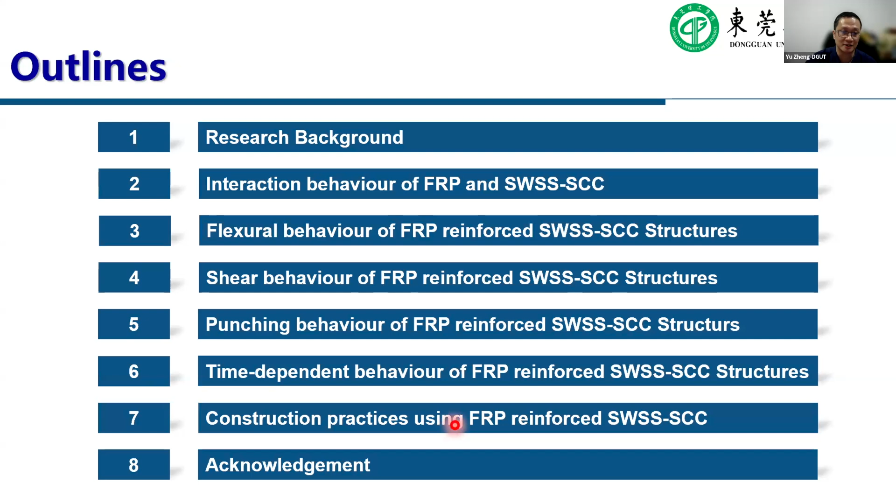First, we want to introduce the research background, since most colleagues in this webinar research composite materials. It has been well reported that the sustainability of infrastructures around the world is threatened due to steel corrosion and high carbon dioxide emissions in the production of cements or concrete materials.

Furthermore, currently in large construction projects in China, river sand is not allowed to be used due to environmental protection factors. Therefore, engineers and academics are seeking solutions to avoid these problems. Therefore, we try to use FRP reinforced self-compacting concrete using seawater and sea sand.

It's also evident that corrosion of steel reinforcement inside concrete has caused serious safety, social, and economic problems. In China, we can find a 2.8 trillion RMB economic loss caused by steel corrosion, around 3.3% of GDP in 2018.

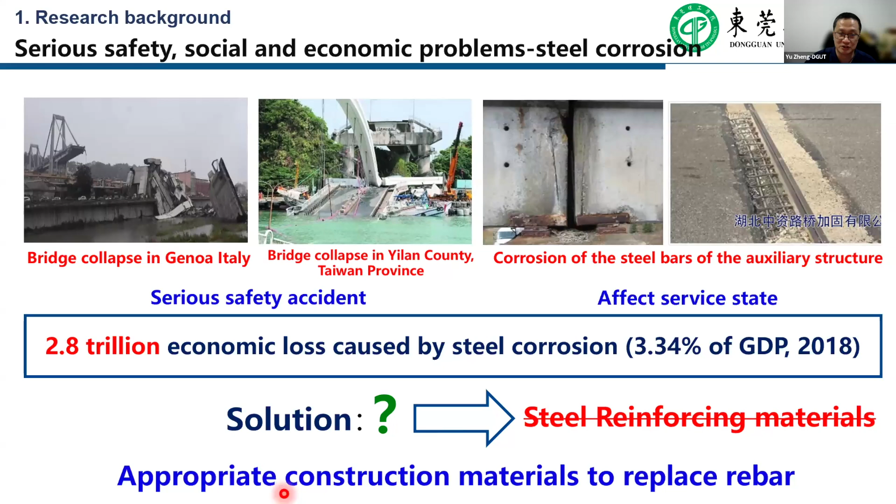Therefore, how to solve that? Maybe we can use some new construction materials to replace the steel rebar. We find that if we use fiber reinforced polymer reinforcing materials, that could be an effective way to solve the problems of short service life, low safety and reliability, and weak disaster prevention or mitigation ability, while meeting high safety and durability requirements.

Furthermore, these materials have lightweight, high strength, corrosion resistance, and convenience for construction, effectively improving structural performance. This reinforcing material can be widely used in marine engineering, bridge engineering, or underground engineering. Furthermore, why do we want to provide research related to self-compacting concrete? Because this is a collaboration between my research group and Susan Taylor's research group at Queen's University.

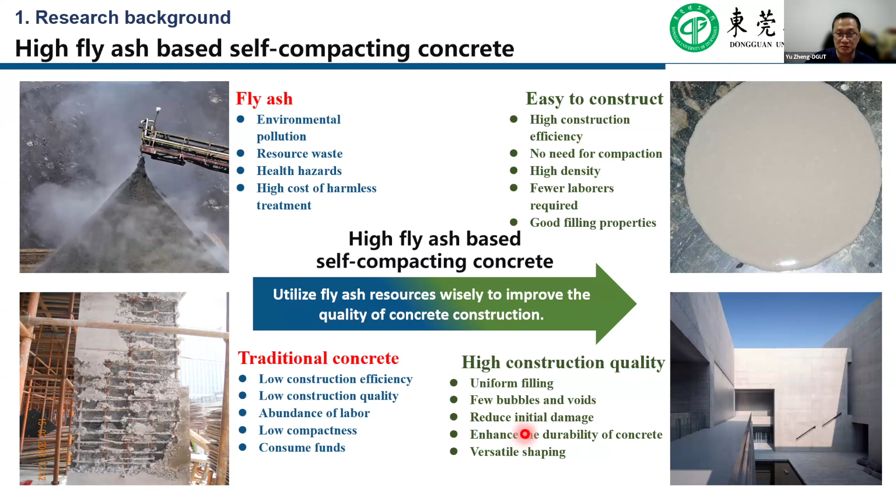We can find that if we use fly ash to replace cement, to produce high volume fly ash self-compacting concrete, compared to traditional concrete it provides uniform filling, few bubbles and voids, reduces initial damage, and enhances the durability of the concrete.

Therefore, when we extend this research to combine seawater and sea sand with high volume fly ash or high volume industry byproduct self-compacting concrete, we find that concrete made with seawater and sea sand develops early strength faster than ordinary concrete, with long-term strength comparable to ordinary concrete.

Furthermore, durability issues can be effectively addressed through FRP reinforcement. Using seawater and sea sand also helps reduce demand for fly ash resources and river sand, and reduces transportation costs. Finally, the behavior of seawater and sea sand self-compacting concrete compared to traditional self-compacting concrete is better. Therefore, we try to combine these materials together to produce it.

Therefore, it has been evident that using FRP as a replacement of steel reinforcement is an effective way to solve steel reinforcement corrosion. And therefore, based on FRP material properties, seawater and sea sand can be used in concrete production.

On the other hand, some environmentally friendly concrete can be adopted by using high volume industrial byproducts such as fly ash as a replacement of cement, to produce self-compacting concrete. Additionally, our research combines those materials together. We try to use FRP as a reinforcing material and use seawater and sea sand self-compacting concrete for construction.

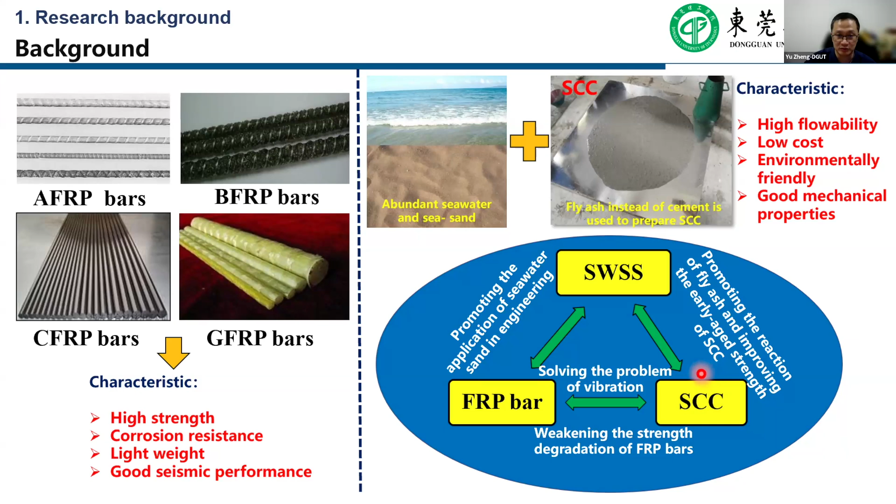Therefore, we can find that it can reduce three problems, including the steel reinforcement, the carbon dioxide emission, and reduce the use of river sand and fresh water. Those problems can be solved together. Therefore, in this research we develop a comprehensive study, including material research, mechanical properties, and component development and construction practice.

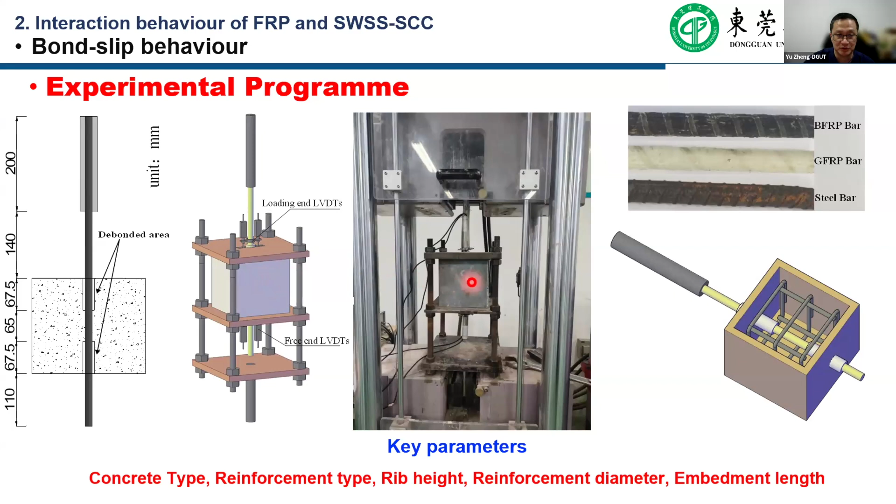The second part of this presentation is where we try to introduce the study of the bond behavior, the tension stiffening behavior of the FRP reinforced SWSS-SCC. In the first stage of the study, we used the pull-out test to study the bond behavior between the reinforcing material and the concrete.

Additionally, we also used the AE method, the acoustic emission method, and piezoceramic transducers to identify the damage process of the bond test. It can be seen in those figures compared to steel reinforcement, the bond strength will be lower due to the lower elastic modulus, and the bond stiffness can also be reduced due to using FRP reinforcement, and some damage can be found after we remove the concrete.

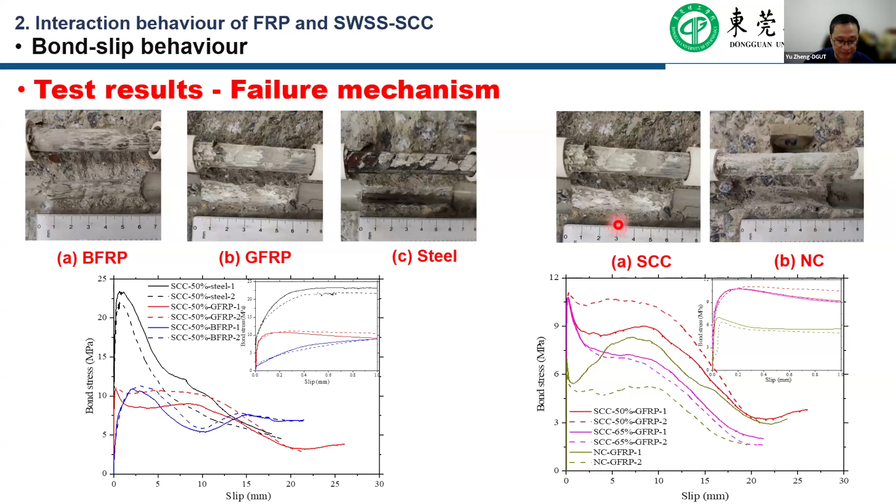Compared with two concretes, self-compacting concrete and normal concrete, due to the better compactness of the self-compacting concrete, we find higher bond strength in the FRP reinforced seawater and sea sand self-compacting concrete. These results can be expected. This is the comparison of the influence of the reinforcing material, including steel and FRP.

Furthermore, we also use some PP fiber inside the concrete. We find that by increasing PP fiber inside the concrete, the bond behavior can be improved. And furthermore, with increasing development length, the bond strength also can be increased at the same time.

And furthermore, we can find that when we use different models, the seawater and sea sand self-compacting model, we can obtain higher bond strength due to the better compactness between the concrete and the FRP reinforcement. And finally, we get some results.

The type of concrete has little effect on the bond strength between FRP and concrete, but using self-compacting concrete can improve the bond strength a bit. And the bond strength decreased with increasing reinforcement diameter. That has been reported widely.

And the bond strength of FRP reinforced seawater and sea sand self-compacting specimens is comparable to steel reinforced seawater and sea sand self-compacting specimens. And the increase of the rib height in the reinforcement has resulted in a significant improvement of the bond strength.

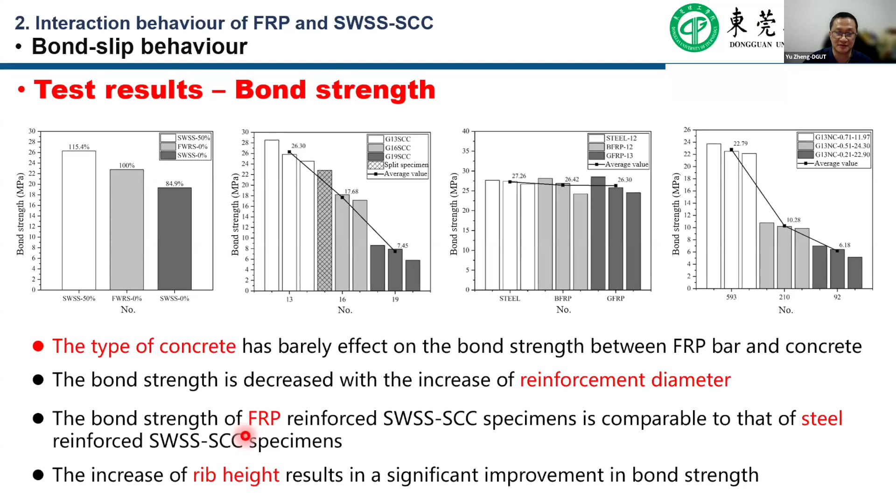In the second part of this stage, we use piezoceramic sensors to try to identify the failure modes of these bond slips, and try to quantify the damage level of the bond failure. This can be found at the beginning of the bond test, and this is with the pull-out test. The signal that can be found will change significantly.

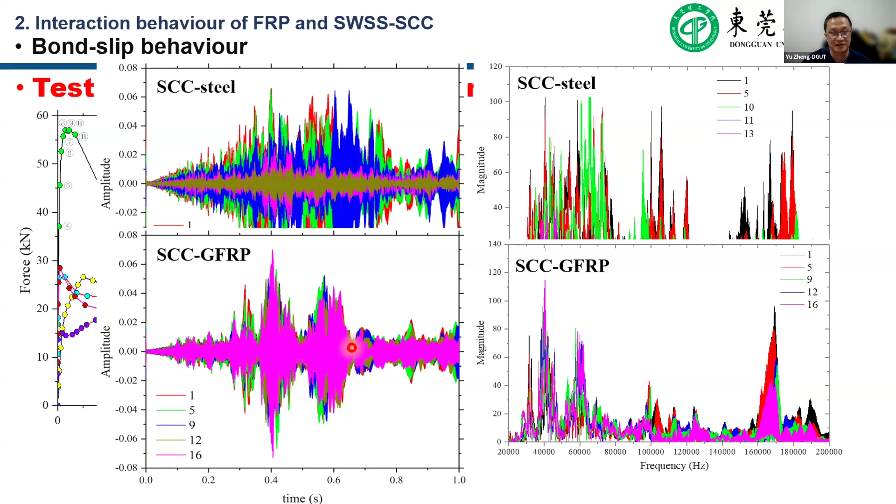And after that, we use the wavelet energy ratio to establish an index to quantify the damage in the bond failure, and we find that it shows a good correlation with the test result. Therefore, we can use that to quantify the damage level of the bond behavior of the FRP and self-compacting concrete.

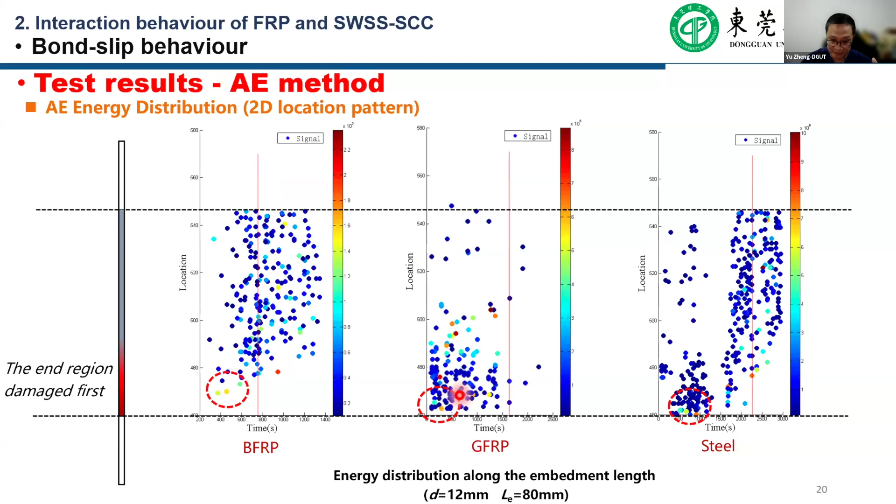And the third part of this study, we try to use the AE method, the acoustic emission method, to try to identify the initial damage location in the bond test. We find that this can identify the initial damage accurately, and it's in the part close to where the load is applied.

And furthermore, we also can use the method to identify the failure modes. We find that for the FRP reinforced specimen, the failure mode is determined by friction, which is dominant. But for the steel one, it is friction combined with mechanical interlock, based on the signals from the AE methods.

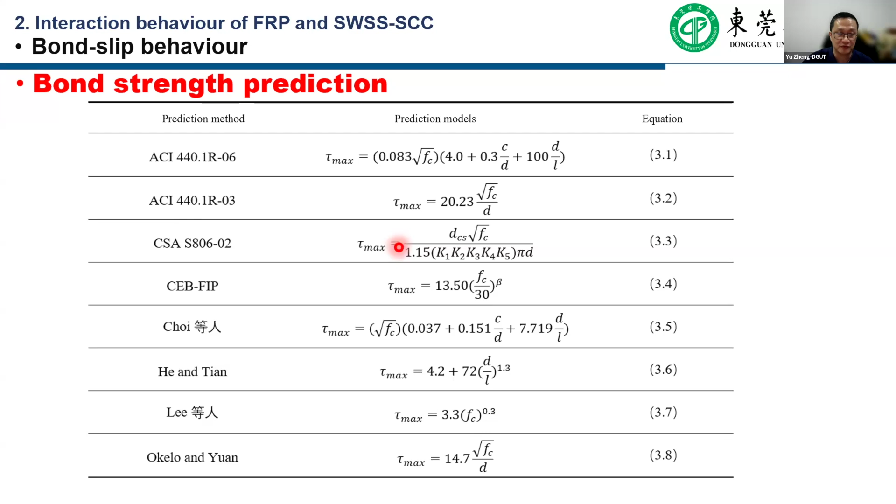And the third part of the bond behavior study, we try to use a current prediction method to try to predict the bond strength and the embedment length for the FRP reinforced seawater and sea sand self-compacting concrete.

In this comparison, we can find that the effect of the reinforcement diameter is overestimated, but the effect of the concrete interface compactness has not been considered. Therefore, we try to consider the small aggregate inside the self-compacting concrete, and try to establish an accurate prediction for the FRP reinforced seawater and sea-sand self-compacting concrete by developing a method for bond strength prediction.

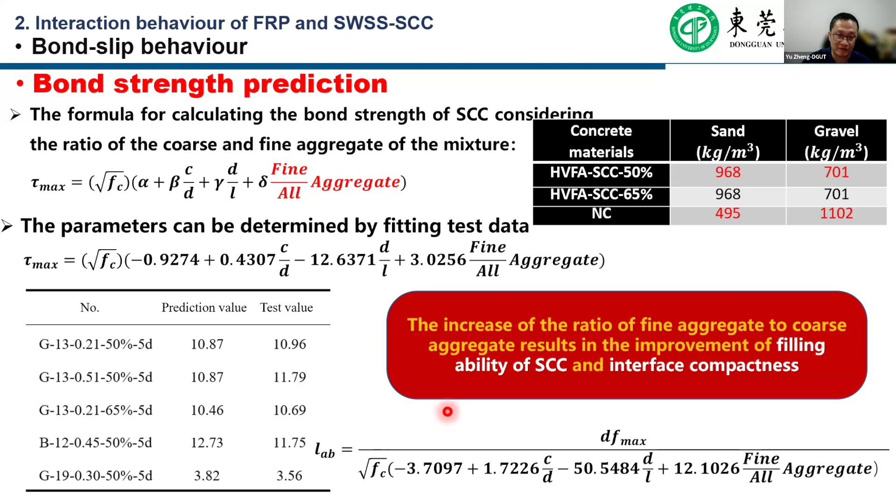Furthermore, we can use that to predict the development length for using FRP and self-compacting concrete in the future. We use the current prediction method for the bond-slip curves, and we find that a modified BPE model shows accurate results to predict the bond-slip behavior for self-compacting concrete and FRP reinforced structures.

Therefore, we try to extend further research using artificial neural network methods to predict bond strength with the following input factors: the bar diameter, the tensile strength of the bar, the elastic modulus of the bar, the concrete compression strength, the thickness of the concrete cover, and the embedment length. A total of 560 experimental data points were collected to establish the database.

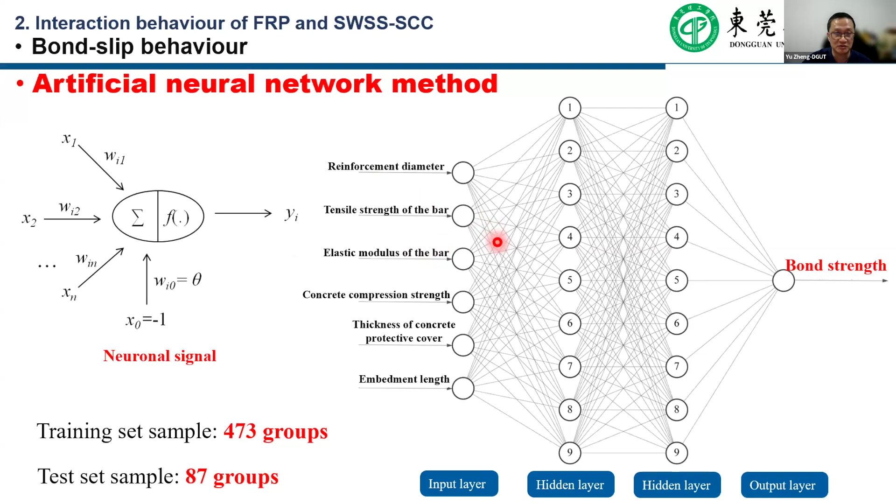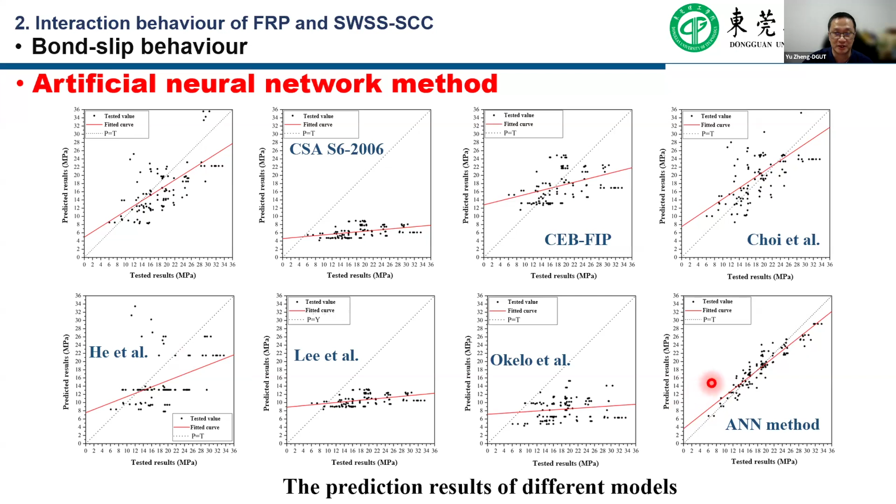We can use the method to predict the accuracy of various formulas, including current design standards and some models reported in the literature. We find that existing formulas predict bond strength with accuracy that is not very good, but using the ANN method, we can predict the bond strength with significantly higher accuracy.

In the second stage of this study, we try to extend this research to study the composite behavior, or the tension stiffening behavior, of FRP reinforced self-compacting concrete. We investigate the composite strength, which can be expressed by this formula, and we study the composite strength and compare it with the strength of the FRP bars.

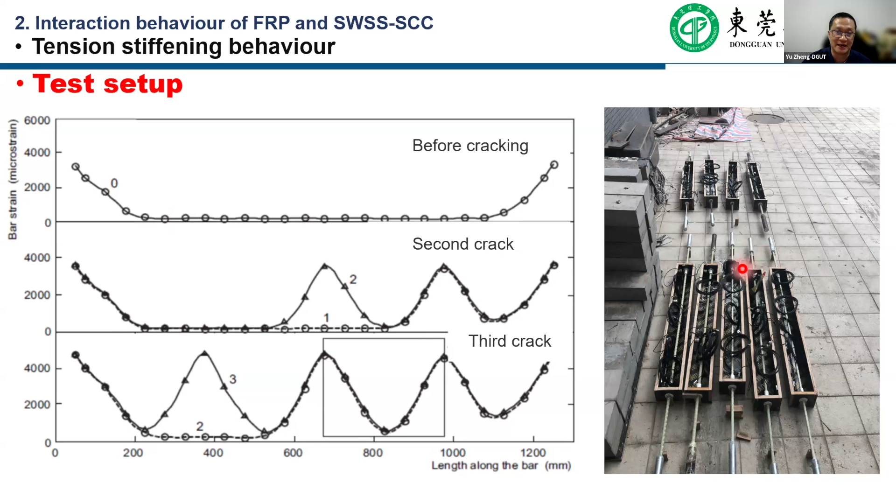We try to investigate the cracking behavior of these specimens, the ones subjected to direct axial forces. In this second stage, we investigate the whole test process before cracking appears and during cracking development. This is the failure mode observed in our study.

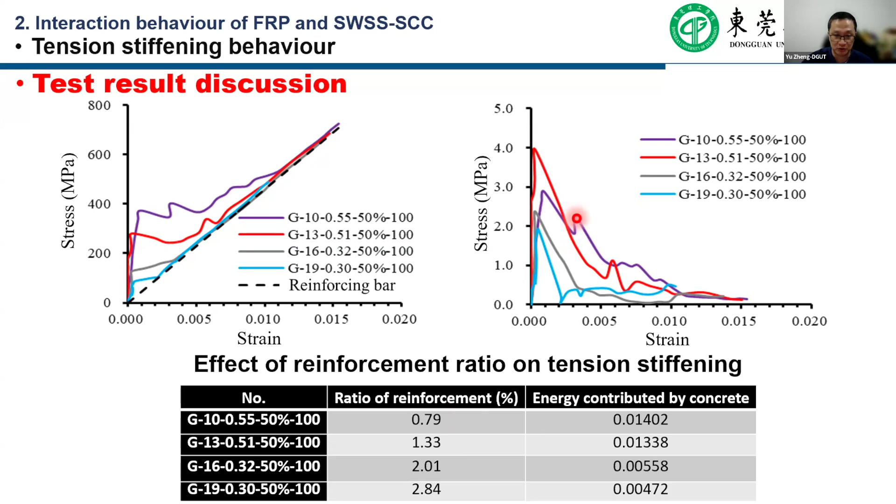We find that the reinforcement ratio has a strong effect on the tension stiffening. When we increase the reinforcement ratio, the energy contributed by the concrete decreases significantly. Finally, we use current design methods, including MC78, Eurocode, and ACI, to compare with our results.

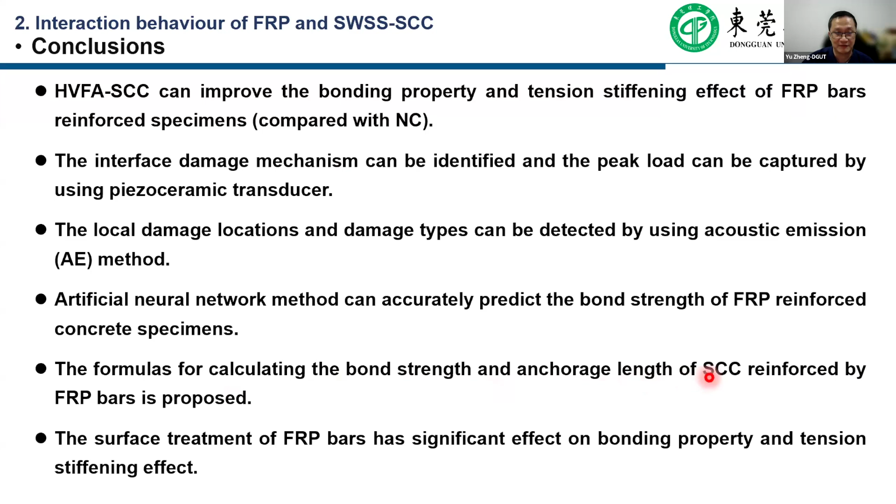We find that Eurocode shows a better prediction compared with the test results. In this stage, we conclude that self-compacting concrete improves bond behavior, and the bond damage mechanism can be identified using the piezoceramic transducer, with local damage location identified using the AE method. The ANN method can accurately predict bond strength using a database with many specimens, and formulas for calculating bond strength and development length for FRP reinforced self-compacting concrete are proposed.

In further study, we will try to study the long-term behavior of FRP and seawater sea-sand self-compacting concrete. The third part of this study investigates the flexural behavior, especially the serviceability, of FRP reinforced seawater sea-sand self-compacting concrete.

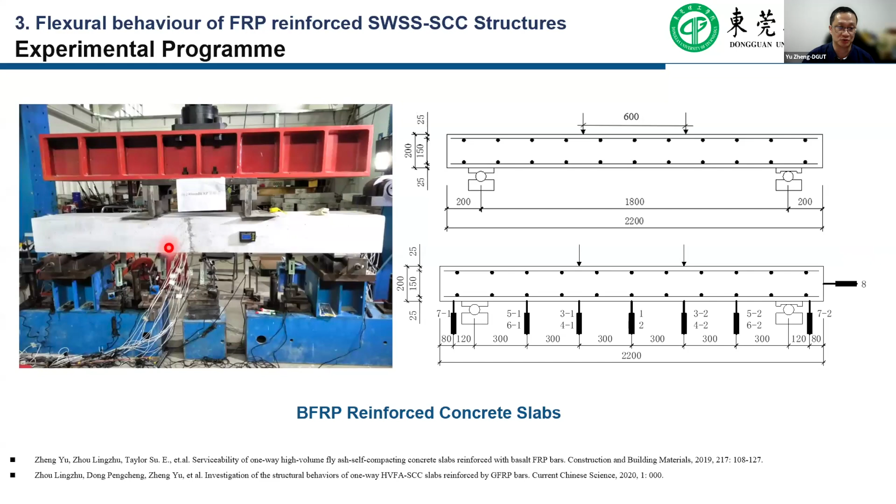We use some one-way slab strips to develop this study. BFRP and GFRP were also used in this study, so we use two types of material. We investigate some reinforcement ratios, and then study the types of material and reinforcing materials, comparing the flexural behavior across these materials.

We can find the failure modes of the flexural components. This is the typical failure mode for the FRP reinforced concrete slab. Shear compression failure can be found obviously, due to the low transverse shear stiffness of FRP reinforcement. This is typical of pure flexural failure found in steel reinforced concrete.

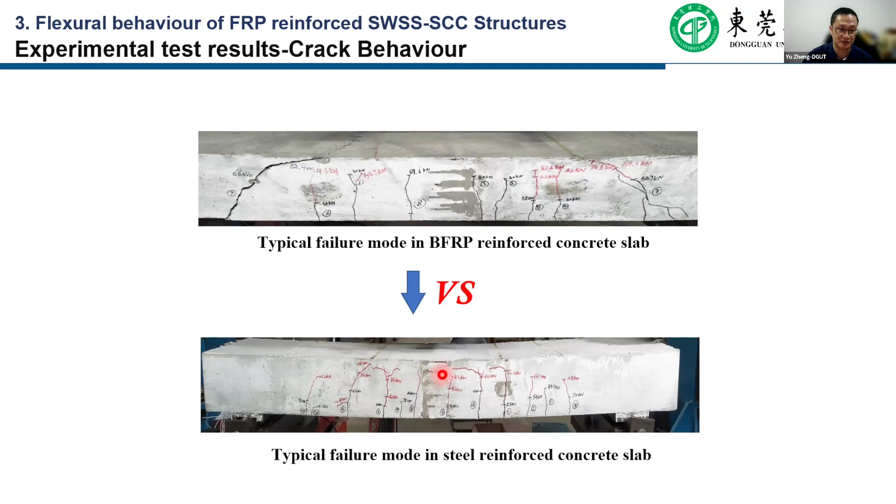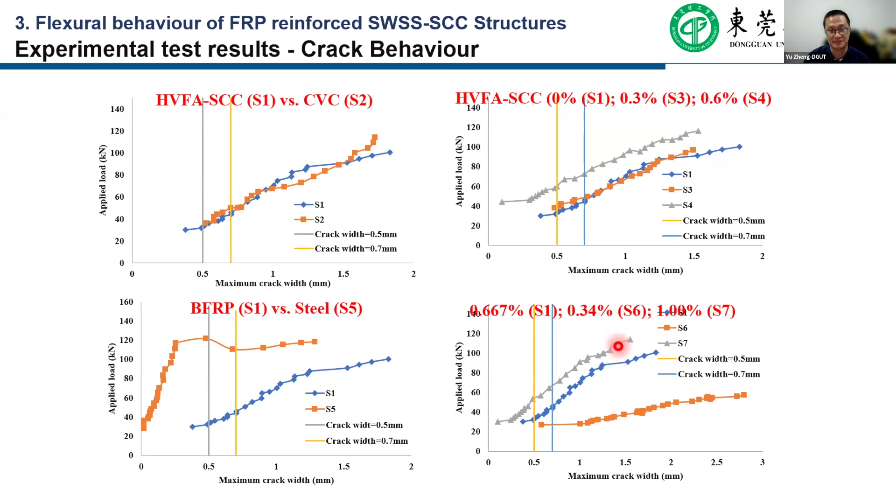We developed the cracking width analysis and found that changes in concrete materials do not have a strong effect on crack width, but increasing PP fibers inside the concrete matrix can reduce the maximum crack width. The reinforcement materials have a strong effect on crack behavior, and increasing the FRP reinforcement percentage results in smaller crack spacing. Those results can be expected accurately.

Furthermore, we found that for the maximum crack width and average crack width, a linear behavior can be found in the FRP reinforced self-compacting concrete. But for the steel reinforced one, a turning point was found in this behavior. This is attributed to the stronger compatibility between the FRP and the self-compacting concrete.

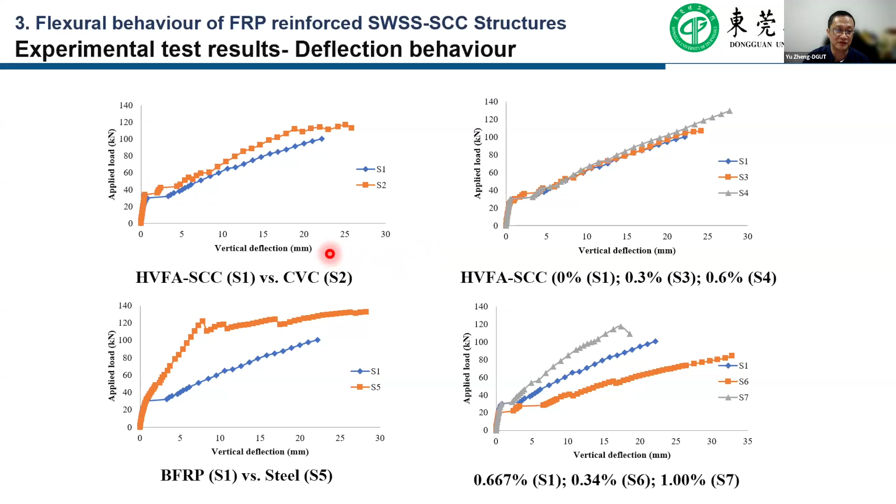For the deflection behavior, the influence factors can be expected, but they will not be discussed here.

In this stage, we try to establish governing factors for structural design for the service limit state. We established three factors: the first is the stress material limitation, included for concrete compressive strength; furthermore, the crack width limitation, and the deflection limitation, each limited to specific values. The maximum crack width was limited to 0.5 to 0.7 millimeters.

In this study, we conclude that for the service limit state in FRP reinforced self-compacting concrete, the service load is related to the ultimate load and the cracking load for comparison purposes. The crack width can be used for designing service behavior.

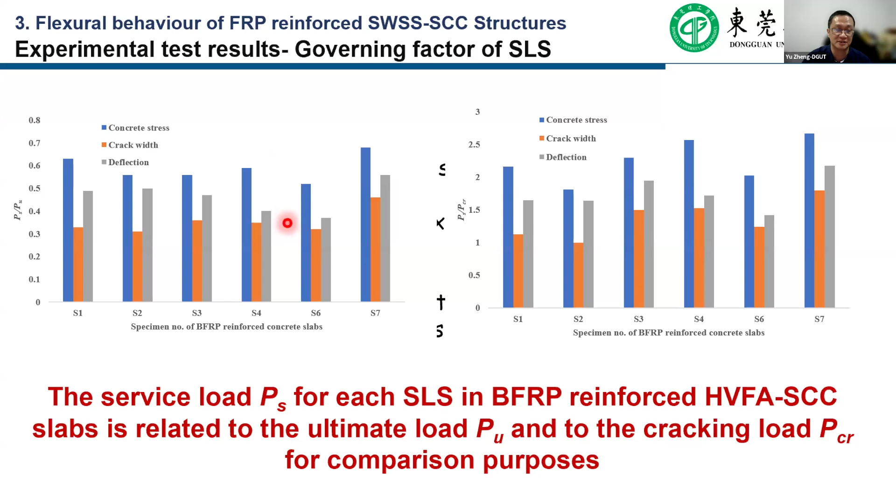For the load and deflection response, we find that most of the current design standards and methods show good correlation with the test results, especially the model provided by Professor Bischoff.

Furthermore, we extended the research to crack spacing. For the maximum spacing, we used the Eurocode and Model Code 2010. We found that the Eurocode shows better prediction; both models show good prediction for maximum cracking spacing.

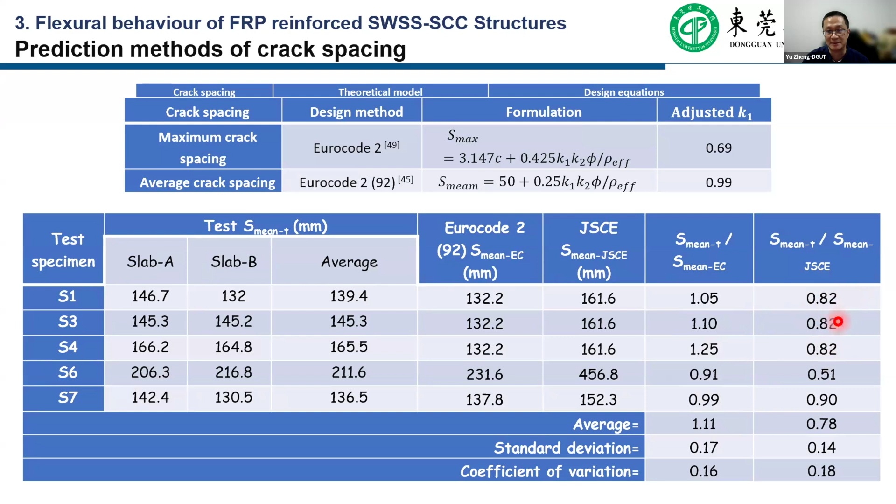But for the average cracking spacing, the bond coefficient needs to be modified. After modification, we find we can use the Eurocode to get good predictions for average crack spacing. But the JSCE, the Japanese code, cannot give accurate predictions.

Finally, we tried to investigate the maximum crack width. Unfortunately, in this study we found that predictions from current design standards and some results in the literature show accuracy that cannot be accepted, and the predictions are quite scattered.

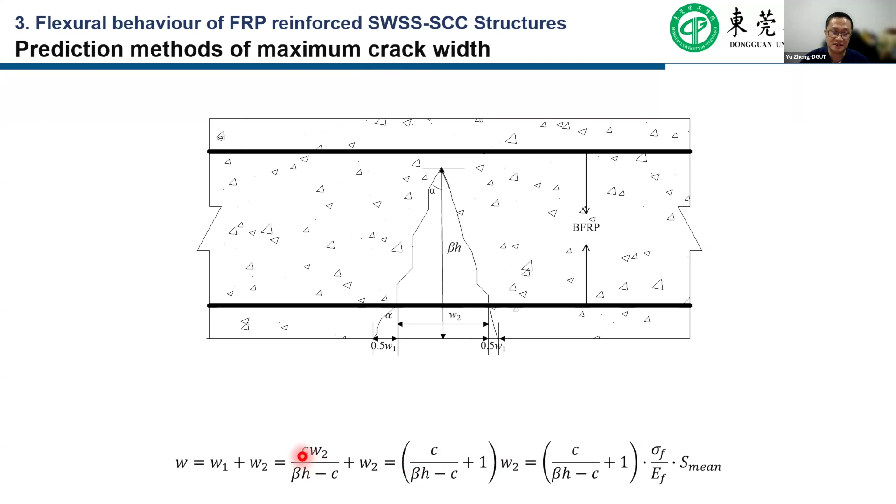Therefore, we established a prediction method to predict the maximum crack width. The details of this prediction method have been reported in my published journal.

We found that our proposed crack width prediction shows good agreement with test results for FRP reinforced seawater and sea sand concrete.

Finally, we reached some conclusions on serviceability behavior. The serviceability behavior of this seawater and sea sand self-compacting concrete is quite similar to conventional vibrating concrete. Varying the axial stiffness of the reinforcement has a strong effect on serviceability, and the most restricted factor for the service limit state is the crack width at service.

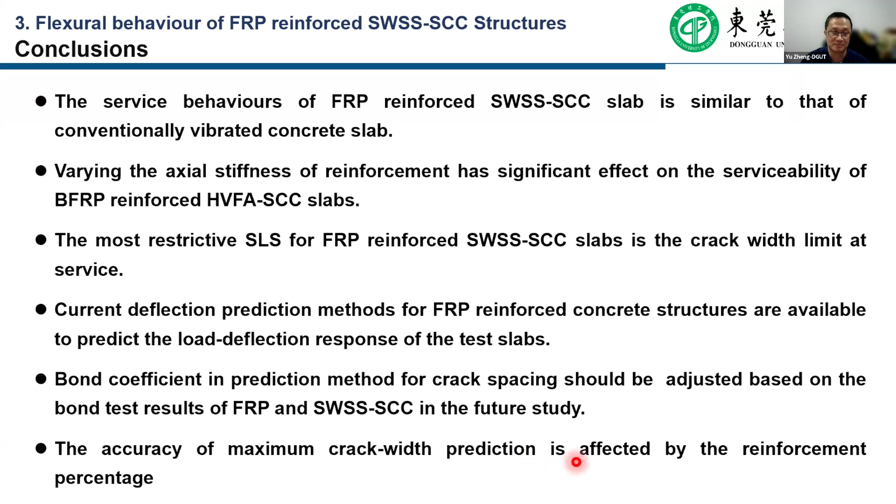Currently, we find that the bond coefficient needs to be modified to predict average crack spacing, and the accuracy of maximum crack width prediction has been improved by the method proposed in this research. Those were affected by the reinforcement percentage.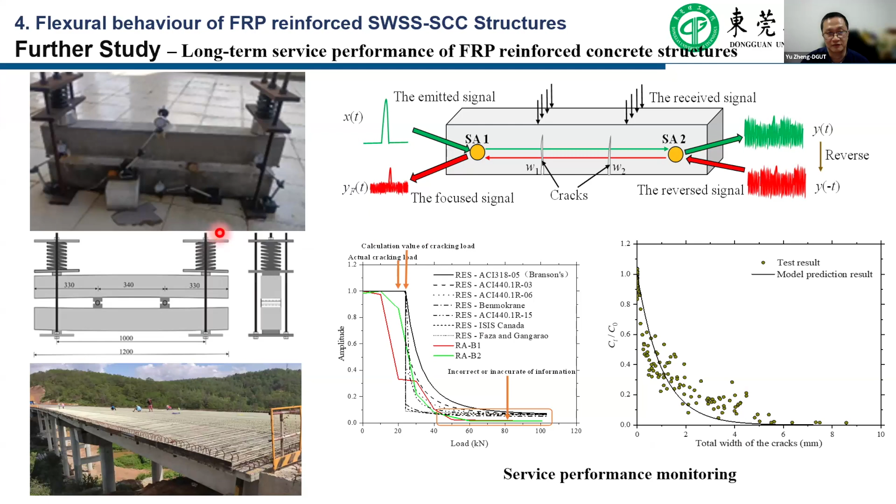For further study in this stage, we will extend research to long-term deformation for FRP reinforced seawater and sea sand self-compacting concrete.

The fourth part of our study, also a key focus of my research, is the shear behavior, especially the shear behavior of FRP reinforced seawater and sea sand self-compacting concrete structures.

We developed a comprehensive experimental study that will not be discussed in detail here, including GFRP reinforced concrete beams, hybrid FRP with GFRP and CFRP, and FRP grids. We published several papers investigating the size effect, the arch effect in deep beams, and the shear contribution from steel stirrups, which have been widely reported.

There are significant disparities in shear performance between FRP reinforced concretes and steel reinforced concretes.

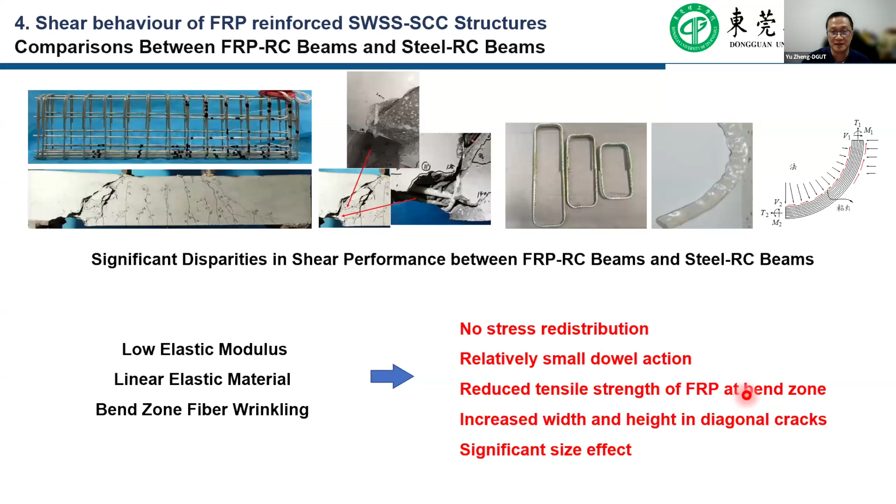This is due to the lower stiff elastic modulus and low linear elastic material, and at the bend zone, the fiber wrinkling causes no stress redistribution and relatively small dowel action, and the reduced tensile strength of FRP at the bend zone increases the width, the height, and the diagonal cracks.

In our current design method, we find that the total shear capacity for FRP reinforced concrete is commonly determined by the combination of the shear contribution from the concrete and from the FRP stirrups. However, current design standards for shear capacity prediction show great variation across different models, lacking consideration of the size effect and the arch effect.

A constant value for the effective strength is commonly used to predict the contribution of the FRP stirrups. At the first stage of this study, we try to modify the prediction method for the contribution from the concrete.

We also examine current design methods. We find that the size effect and arch effect have been considered in several codes, including the CSA model and the ACI codes.

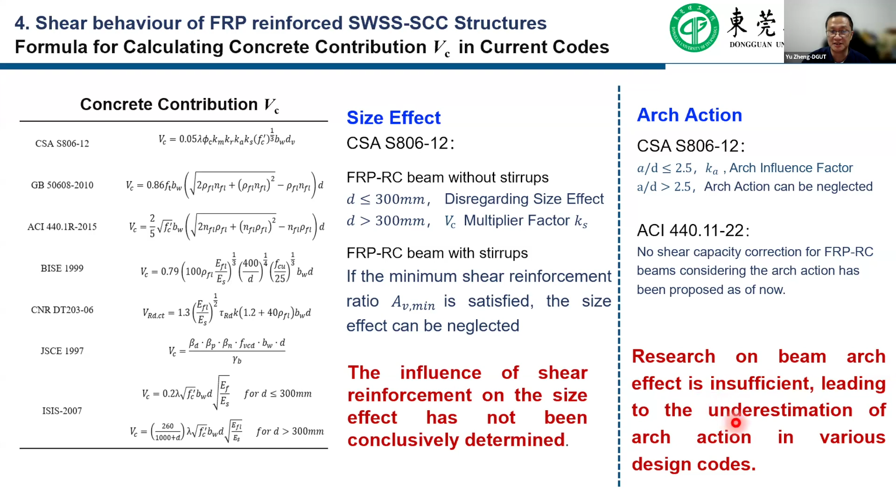But for the CSA model, the influence of the shear reinforcement on the size effect has not been conclusively determined, and research on beams regarding the arch effect is insufficient, leading to some underestimation of the arch action in the various design codes.

In these methods, we find that the factors have been investigated fully in my study: the size effect has been considered in three models, and the arch action has been considered in the CSA model. Therefore, we established a database, including our own experimental works.

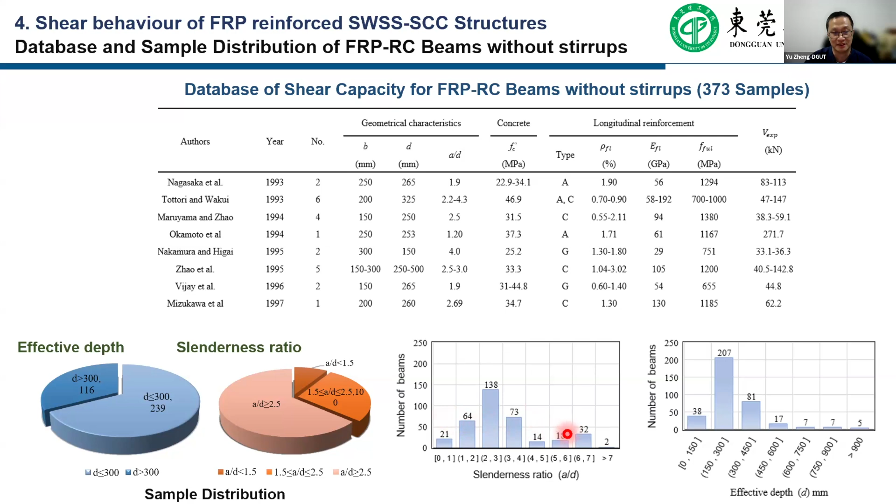The first database is for beams without stirrups. This shows the variation, the distribution of some of the models in our database, including the slenderness ratio and the effective depths.

For this database, we carried out a Pearson correlation study. We find that a strong positive correlation is detected between the effective depth and the shear capacity, indicating that as the effective depth increases, the shear capacity increases too.

Furthermore, we find the same effect for the shear span ratio. The ratio between the shear span and the effective depth has a strong negative correlation with the shear capacity.

We used current design standards to predict test results in our database. We find that significant errors occur in models with a small shear span ratio, especially for span ratios smaller than 2.5.

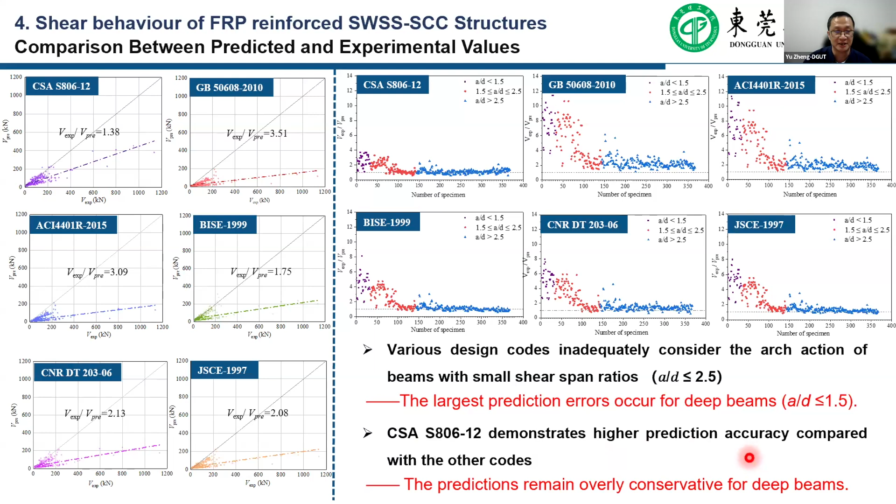We find that compared to the other design codes, the CSA model shows higher prediction accuracy due to the size effect and arch action being considered in that model.

We developed some statistical analysis which is quite complicated and will not be discussed here. Based on this statistical analysis, we tried to develop modifications for the CSA model.

We developed several numerical models to investigate the influence of the shear span ratio on the shear capacity. We find that this value, 2.5, should be modified to 3.

After the shear span ratio, if it's less than 3, the nominal shear strength decreases significantly with the increase of this ratio, as can be found in this figure. But with a shear span ratio larger than 3, the nominal shear strength stabilizes.

This means this limit value shows that the influence could be determined as the influence factor for the arch action inside the concrete beams.

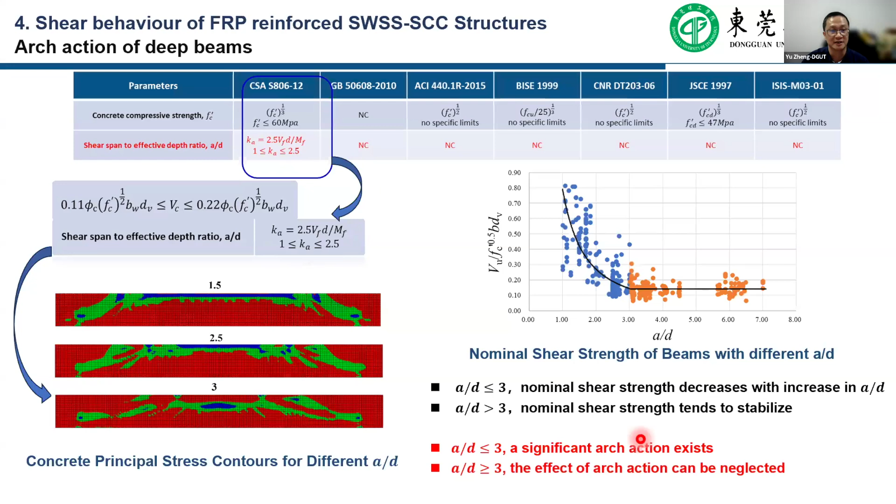Based on these two observations from the test and analysis, we tried to modify the CSA model. First, the size effect should be considered throughout the whole process, regardless of whether the stirrup ratio is larger than the minimum stirrup ratio value.

Furthermore, the 2.5 limit value should be modified to 3, and the size effect should be considered even when the effective depth of the concrete beam is larger than 300 millimeters.

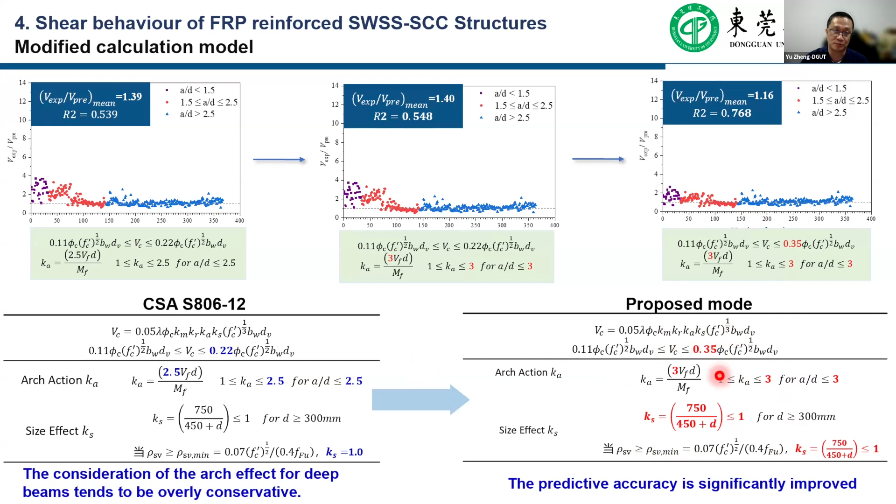After this correct modification, we can find that the accuracy can be improved significantly. Therefore, we can use this model to predict the contribution of the concrete, the self-compacting concrete, to the shear capacity.

In the second part of this study, we try to establish an accurate prediction method for the shear capacity contribution from the FRP stirrups. We also use the current design standard to develop some investigation. We find that investigation of the effective strength for the FRP reinforcement, the FRP stirrup, is necessary.

But in the current design standard, a constant value is used. However, in Fico's study, it recommends the strength limits for the stirrups need to be modified according to the materials of the FRP. Therefore, we established a database with FRP stirrups and without FRP stirrups cases, including 81 samples.

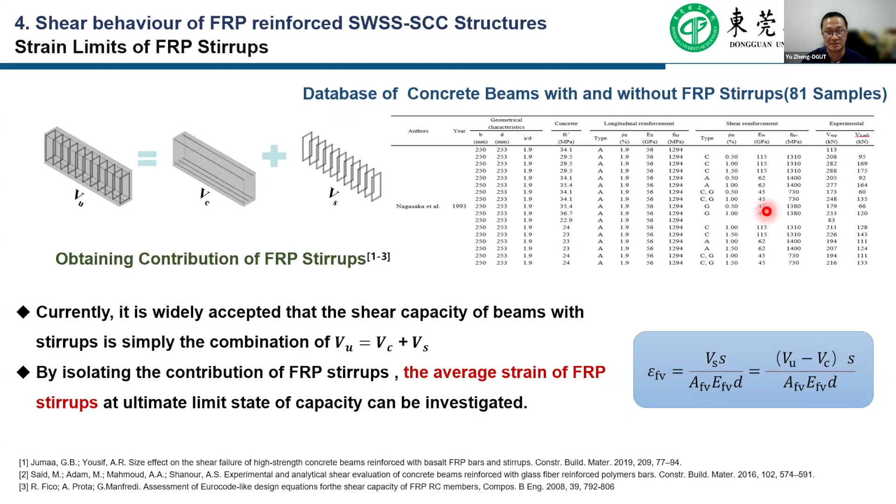We use this model, the total shear capacity minus the model without the FRP stirrup, to obtain the shear capacity contribution from the FRP stirrup. We use that to study the average strain of the FRP stirrup at the ultimate state, investigated based on this database. Therefore, we can use test results to compare to the current design standard.

We find that only the JSCE model uses a function to predict the effective strain for the FRP stirrup. However, the prediction accuracy is quite low, because the influence factors have not been considered accurately by this model. Furthermore, we find that the CSA model and the ACI model use a constant value, so the prediction accuracy cannot be acceptable.

The influence of structural variables on the strain limits for the FRP stirrup needs to be studied further. In the beginning stage, we find that with the changing of the FRP material for the FRP stirrup, at the ultimate state capacity, the average strain of the FRP stirrup is not a constant, and is closely related to several design parameters.

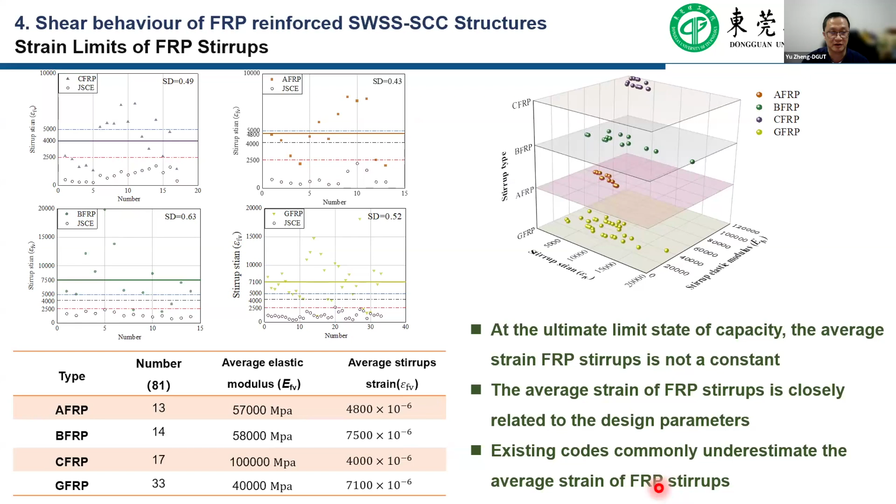The current design commonly underestimates the average strain of the FRP stirrups. Those values will change depending on the FRP materials. Therefore, we also develop a Pearson analysis for this method.

We find that the concrete strength, the effective depth, the longitudinal reinforcement percentage, the elastic modulus of the longitudinal FRP bars, and the shear-span ratio all have a positive correlation with effective strain. Furthermore, the ratio of the FRP stirrup and the material elastic modulus of FRP stirrup exhibit a negative correlation. We use that to develop a statistical analysis.

After some regression analysis, we establish a function to predict the effective strain for the FRP stirrups. Furthermore, for safety consideration, we recommend a dual control approach based on the strain limits for the shear reinforcement and the strength at the bending zone for the FRP stirrup. This two-way control approach will be used.

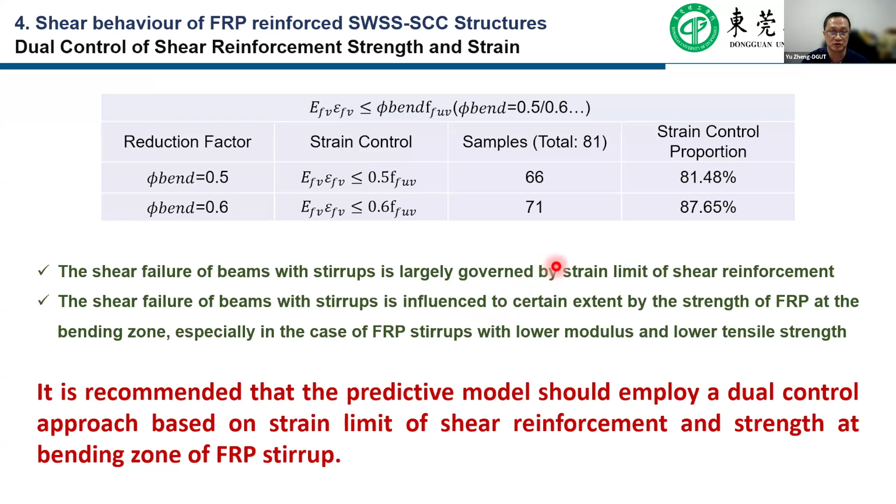Using this method, we find that compared to the current design standard, the effective strain of the FRP stirrup can be predicted accurately. After that, we combine these methods together.

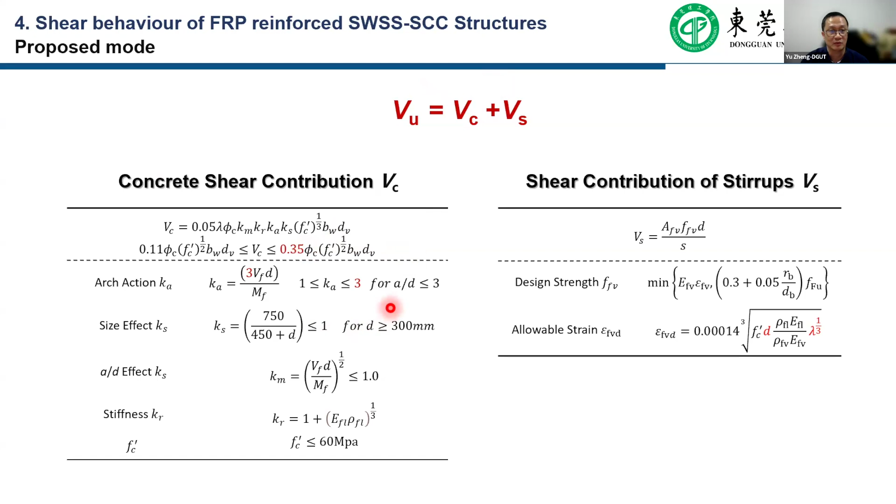Combining the contribution from the concrete and from the stirrup, after comparison with a third database for correlation, we find that our proposed model shows better correlation with the prediction results.

In conclusion, the existing codes did not fully consider the arch action and the size effect. The FRP stirrup works less effectively to avoid the size effect, and the size effect cannot be suppressed completely by using FRP stirrup. The size effect still needs to be considered, even though FRP stirrup is used for the construction.

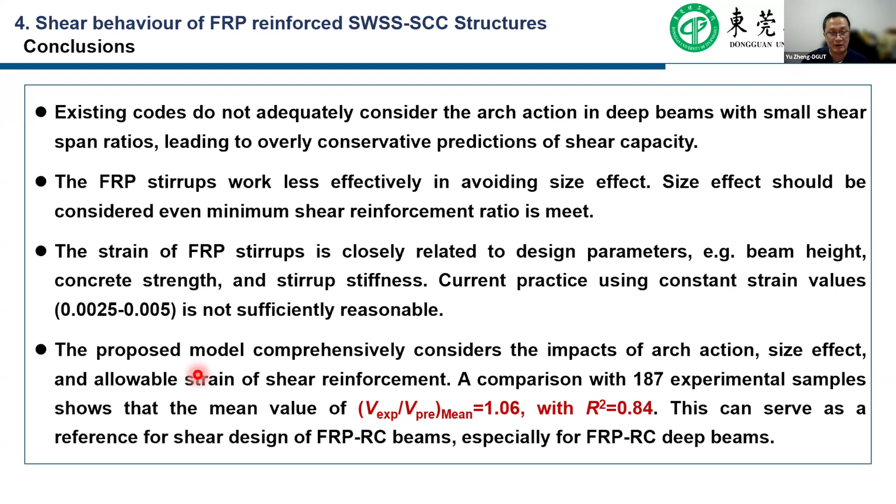The strain of the FRP stirrup is closely related to several structural parameters, such as the beam depth, the concrete strength, and the stirrup stiffness. The current practice design standard using a constant value is not reasonable, and our proposed model shows good correlation with the test results.

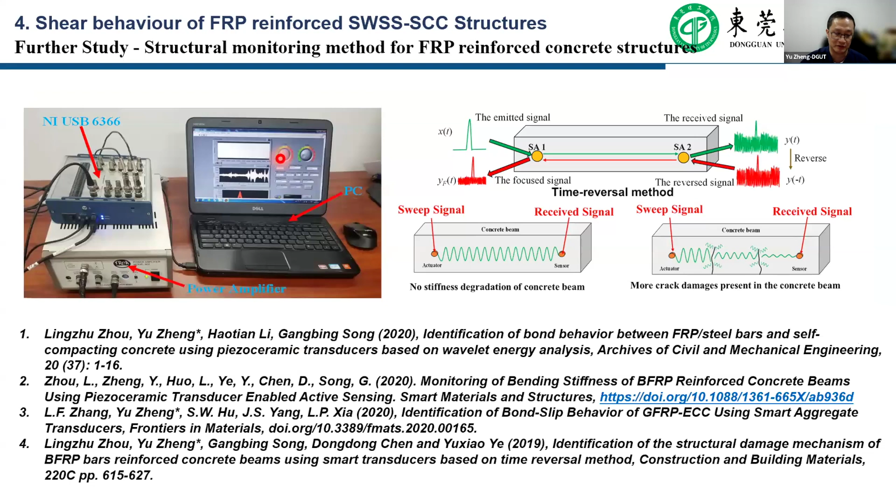For further study, we want to use novel structural health monitoring to investigate the shear failure mechanism. Furthermore, we want to use construction-friendly materials, because the FRP stirrup is not a construction-friendly production.

We try to use some FRP mesh, some soft FRP mesh, to replace the FRP stirrup as the FRP reinforcement material for FRP reinforced concrete structures in the future. This is our further study.

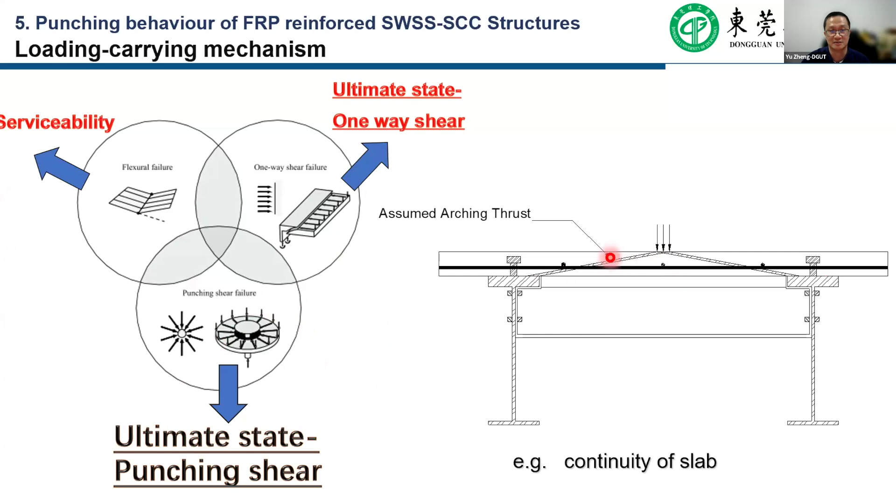The fifth part in my presentation is the punching behavior of FRP reinforced self-compacting concrete structures. Our study focuses on concrete bridge deck slabs, because punching failure is a common failure mode for bridge deck slabs. Furthermore, due to the existence of external restraint stiffness, this action has a strong effect on the structural behavior.

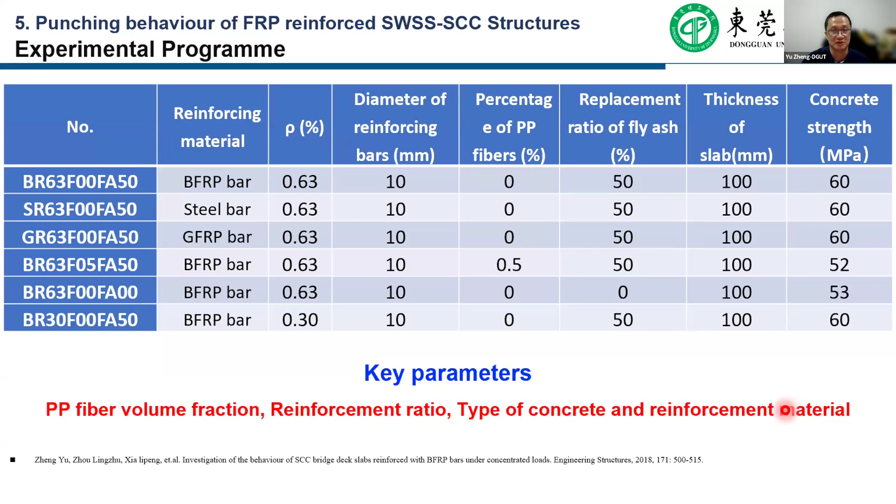These are the structural variables in our study. We try to investigate the reinforcement ratio, the type of concrete, and the reinforcing material. These are the test specimen preparations in our study.

In the test results, we can find that punching behavior is dominant in all the specimens. But if we use some PP fiber inside the self-compacting concrete, the failure will not be as brittle compared to the model without the PP fibers.

Furthermore, we try to investigate the punching angle, because we found that smaller punching angles mean larger contact areas between the concrete. Using this Mohr circle method, we find that increasing the horizontal restraint, the punching angle could be reduced, meaning higher punching capacity can be obtained.

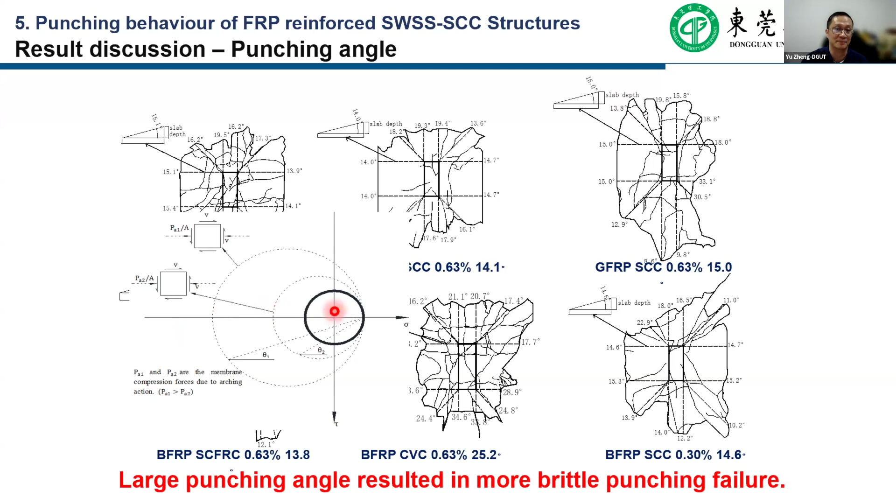We also use this to predict it, and we find that in this method, since the restraint stiffness is fixed, the punching angle is also fixed.

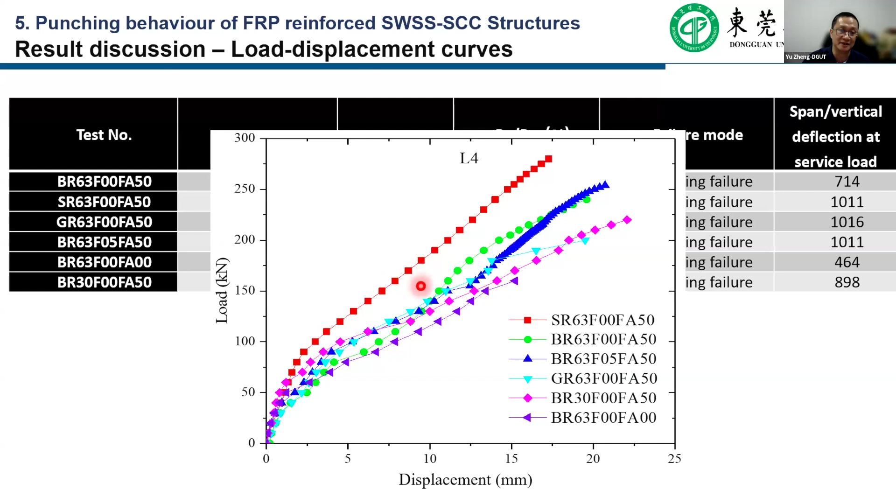We also developed a study on the cracking behavior with the ultimate strength, and it is expected that bilinear behavior can be found for these deck specimens.

The focus of this study is to establish a punching capacity prediction method with consideration of the arching action inside these concrete bridge deck slabs.

We used the model in cooperation with Queen's University of Belfast, as part of our jointly published paper in the ACI Structural Journal. This is the prediction procedure.

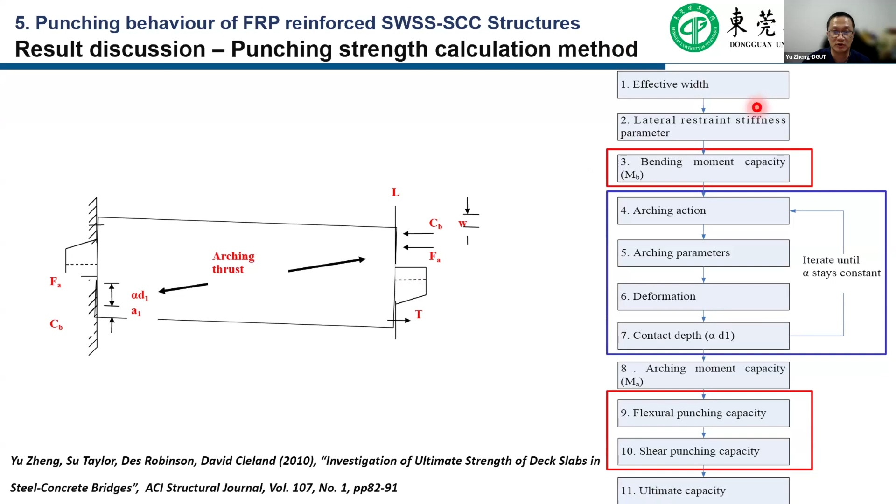Because of the existing arching action, the height of the compression zone can be increased compared to the bending prediction series. We use this model for steel reinforced concrete bridge deck slabs.

Therefore, using this method, we also consider the flexural punching behavior and the shear punching behavior in this prediction. Furthermore, in the first part, we also try to establish the effective width considering the arching action inside the concrete, and we need to quantify the external restraint stiffness.

These models, the first two parts of this prediction, can also be found in this journal paper.

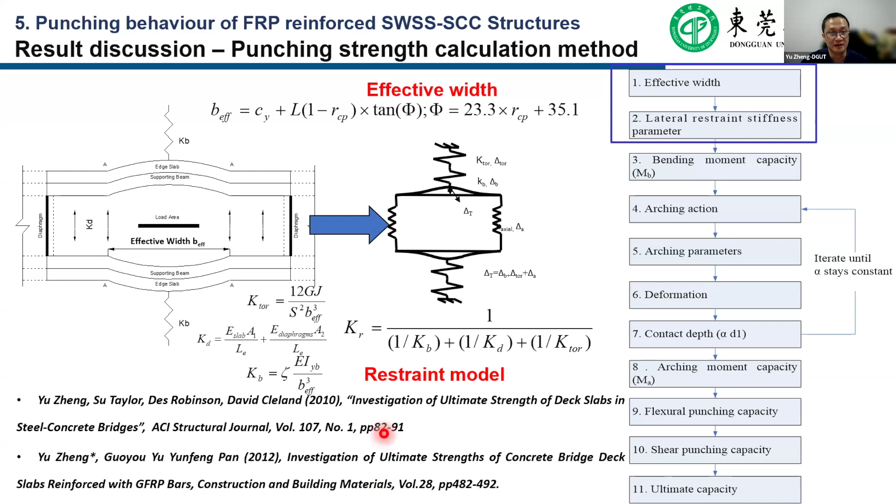In our study, the focus is that due to the increasing height of the compression zone inside the concrete, the effective stress level of the FRP reinforcement inside the bridge decks needs to be predicted accurately.

Therefore, we propose an integration method to predict the effective stress level inside the concrete bridge decks. We can use this to predict it.

Furthermore, we also propose a modification to predict the shear punching capacity with consideration of the difference between FRP reinforcement and steel reinforcement. These methods have also been published in our paper in Engineering Structures.

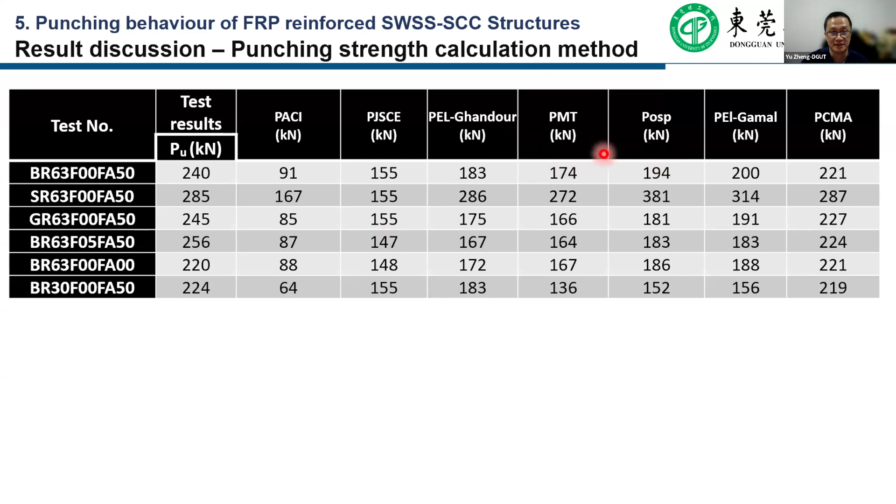After that, we compare our test results with current design standards and some punching prediction models from published papers. This is our model; we can find that our model shows better agreement with the test results.

After that, we extend this research to establish a database from the reported literature. We find that the current prediction methods do not have good accuracy, and furthermore, the reliability is not good either.

But if we use our method with this database, our model can predict the punching capacity for FRP reinforced bridge deck slabs accurately.

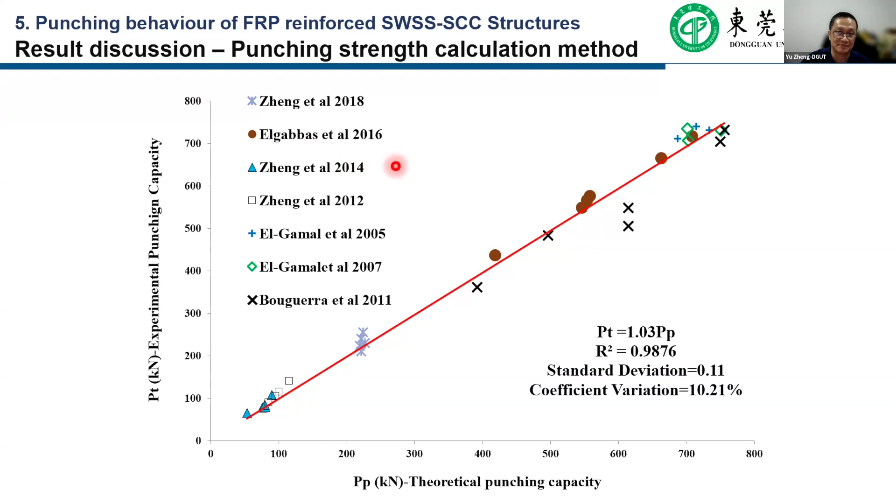In conclusion, the experimental and theoretical investigation found that FRP reinforced self-compacting concrete shows similar behavior to normal concrete structure bridge deck slabs.

The reinforcement ratio has little effect on the bearing capacity of the bridge deck due to the existence of arching action or compression membrane action. The current design standard is quite conservative.

Our proposed models show good correlation with the test results. The further study for this part extends to construction practice.

The final part of this investigation is the time-dependent behavior of the FRP reinforced seawater and sea sand self-compacting concrete structure. We developed studies on shrinkage and creep for this novel concrete material, as well as the time-dependent behavior of the interface and long-term deformation for GFRP reinforced seawater and sea sand concrete beams.

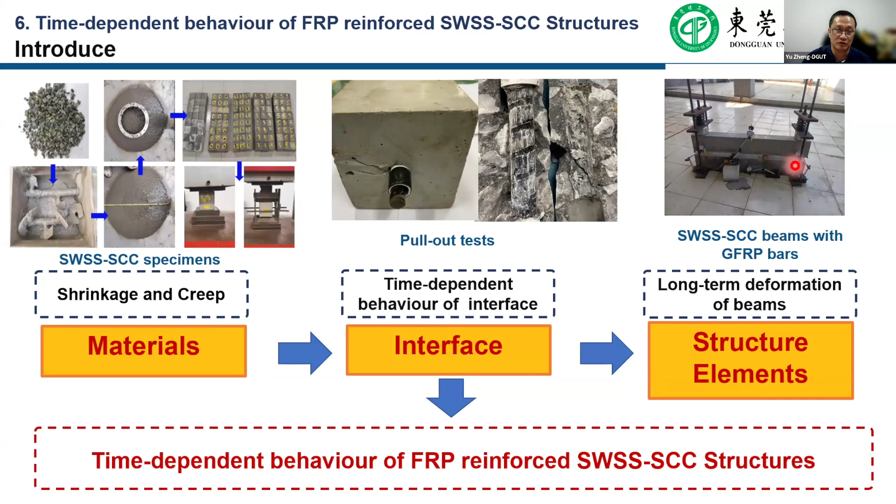In the first part, we investigate total shrinkage, including autogenous and drying shrinkage, for these concrete materials. We can find in these figures, when the other parameters are the same...

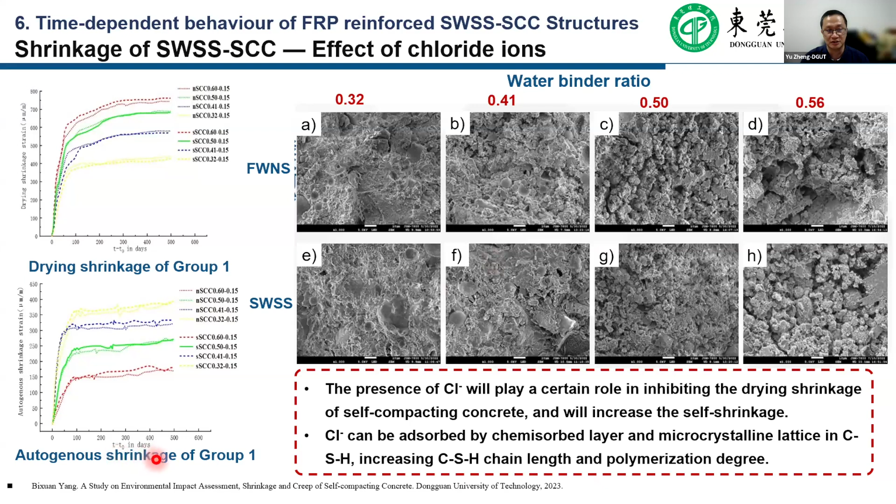Due to the seawater and sea sand used in this study, increasing the chloride ions played a certain role in reducing the drying shrinkage while increasing the autogenous shrinkage for this seawater and sea sand concrete.

Furthermore, increasing the curing temperature for the seawater and sea sand self-compacting concrete can increase the secondary hydration of the fly ash and speed up the hydration process. Therefore, the autogenous shrinkage strain is increased.

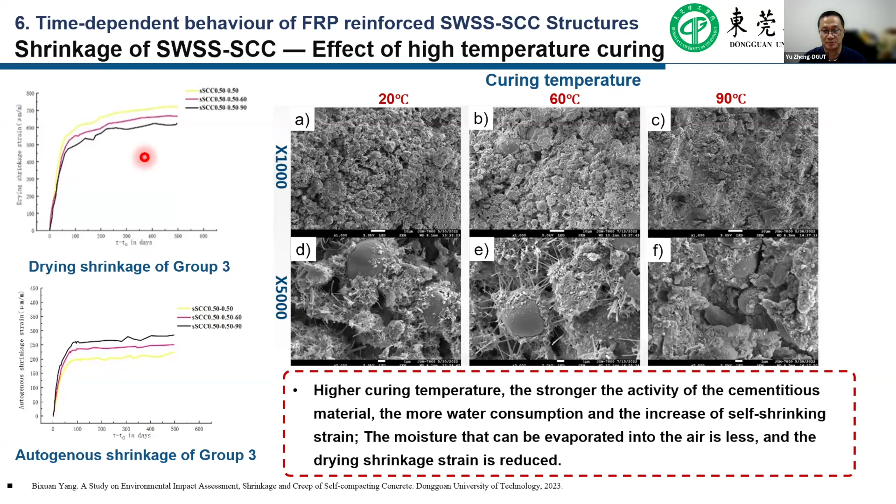Furthermore, the shrinkage of specimens under high temperature curing reaches the stable strength period about 20 days earlier than that of ordinary specimens.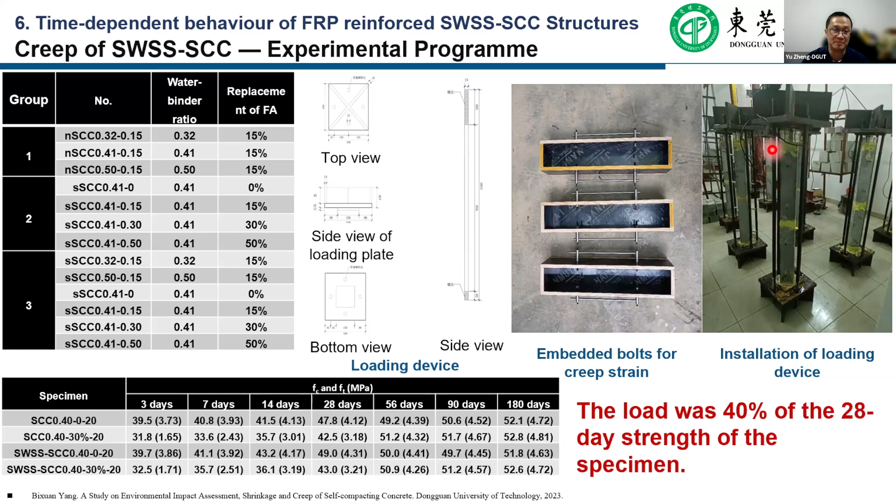In the second part, we study the creep behavior of these concrete materials. We found that current design codes cannot be used directly for this seawater and sea sand self-compacting concrete. The prediction formula needs to be modified considering the correlation coefficient, since increasing concrete strength and environmental relative humidity have a strong influence on the test results.

The modified parameters were obtained by fitting results from normalization of relevant literature, and the modified result was obtained using Bazant's model. After normalization, the environmental humidity and strength correlation coefficient can be optimized, improving the results of the multiple prediction formulas.

The second stage in the time-dependent behavior study, similar to a pull-out test, investigates the interface between the FRP and the seawater and sea sand self-compacting concrete. This is the loading device for the sustained loads.

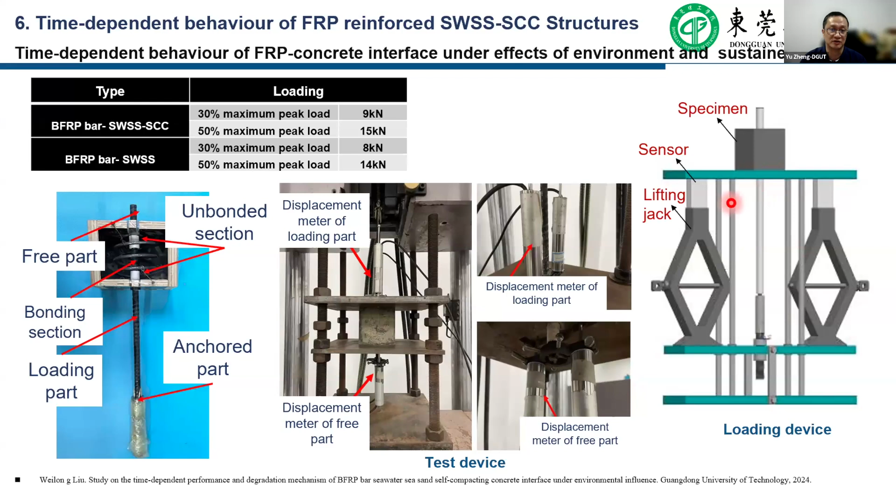After removing the sustained load, we found that because high volume fly ash is used in this concrete, fly ash fillings can be seen in the pores of the seawater and sea sand self-compacting concrete. These fillings refine the porous structure, make the concrete more dense, reduce permeability, and improve the durability of the interfacial bond between the reinforcement and the concrete.

The damage degree of the fiber and resin matrix inside the FRP bars is consistent with the degradation degree of the bond strength between the FRP bars and the concrete interface. We found that with increased sustained load level, the slip amount increased significantly.

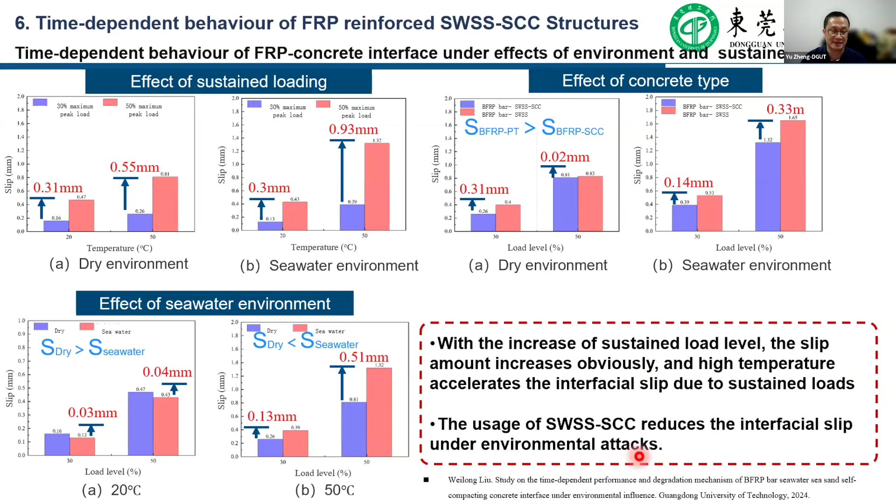High temperature also accelerated the interfacial slip due to the sustained loads. The use of seawater and sea sand self-compacting concrete reduces the interfacial slip under environmental attacks due to the better compactness of these concrete materials.

Furthermore, regarding the time-dependent behavior of the FRP and concrete interface under the effects of environmental conditions and sustained load, we can draw conclusions based on these figures: the higher the loading holding level, the larger the scope found for the nominal bond retention rate, and the longer the load holding time, the smaller the scope found. This shows that the formation of cracks during load holding reduces the bonding properties due to stress concentration.

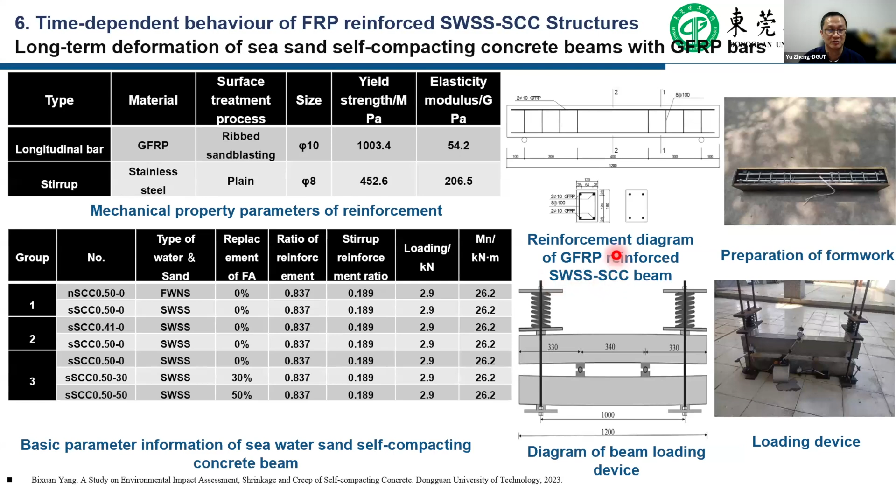For the final part of this study, we developed concrete beams reinforced using seawater and sea sand self-compacting concrete and GFRP, to investigate the long-term deformation. Due to the time limit, I will speed up my presentation. The long-term deformation test of the beams is still ongoing.

The transfer period was at 28 days. The shrinkage of the FRP reinforced concrete beams tested is basically consistent with that of the unreinforced concrete beams under the same conditions. We found that using high volume fly ash can reduce the mid-span deformation to some extent.

Results show that fly ash and chloride ions can reduce the shrinkage and creep of the seawater and sea sand self-compacting concrete. The initial creep develops significantly at the early stage.

Compared to environmental attack alone, the coupling of sustained loads and the seawater and sea sand environment can increase the relative slip between the free end of the FRP bars and concrete. The variation trend of shrinkage and creep of the GFRP reinforced seawater and sea sand self-compacting beams is consistent with that of ordinary beams.

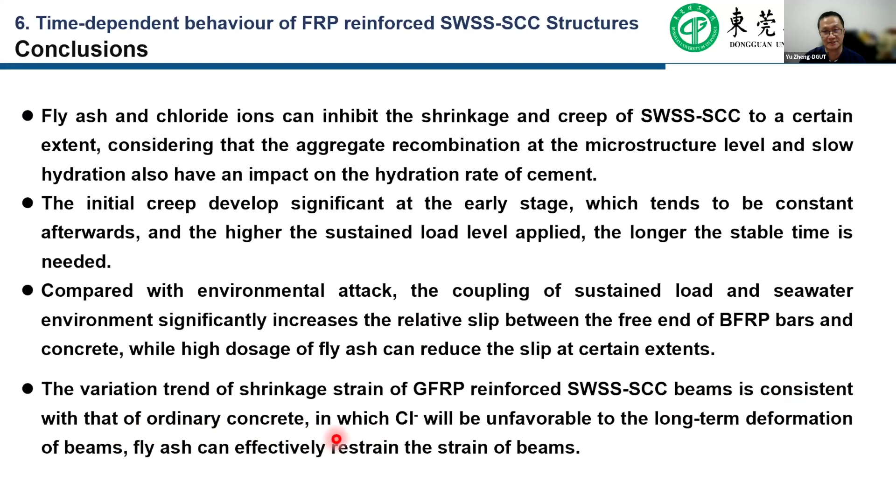Our further study will try to extend this to real structures. I will take about 1 to 2 minutes to introduce our construction practice.

Until now we have also developed construction practice in more than 32 practical constructions, including bridge deck slabs, concrete interior layers, link slabs, prefabricated structures, and MIC models.

This is one of our tests, a cooperation with Queen's University. This is a bridge built in Northern Ireland.

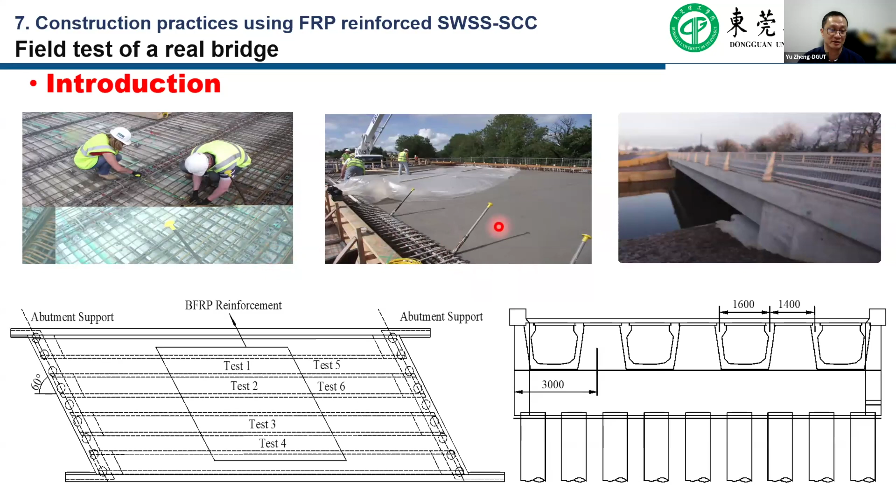Those 4 panels are for the FRP reinforced self-compacting concrete, and this is for the steel reinforced one. This is our field test with configuration for the optical sensors.

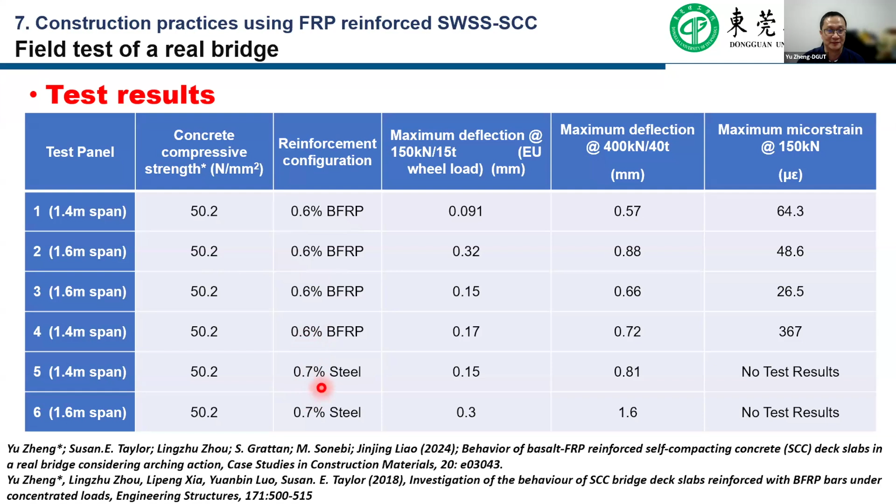This is the arrangement we used, considering the arching action inside the bridge deck. The reinforcement ratio is quite low, as can be seen, even smaller than the steel one, because we consider the action inside.

But the applied load is around 3 times the maximum wheel load in the European code, 150 kilonewtons or 15 tons. It was found that 400 kilonewtons was used in the field test, and the recovery is quite good.

The most interesting part is that we can compare the load and deflection of the FRP reinforced bridge decks and the steel reinforced bridge deck. Even though the reinforcement ratio is similar...

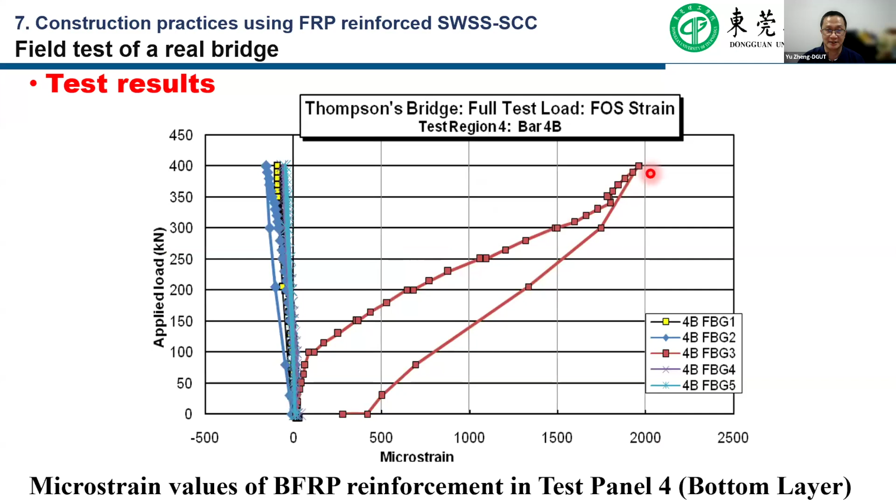The FRP reinforced bridge deck slabs show similar behavior to the steel reinforced one due to the arching action. The total deformation behavior is also very similar, and the strain is very small in this test, and the crack width is also very small.

This is the result of our structural health monitoring in the real test for a truck passing the bridge. We can find that the strain value inside the BFRP reinforcement is very small, smaller than 20% of the ultimate strength.

We also developed a numerical test for moving loads to study these cracks, which will not be discussed here.

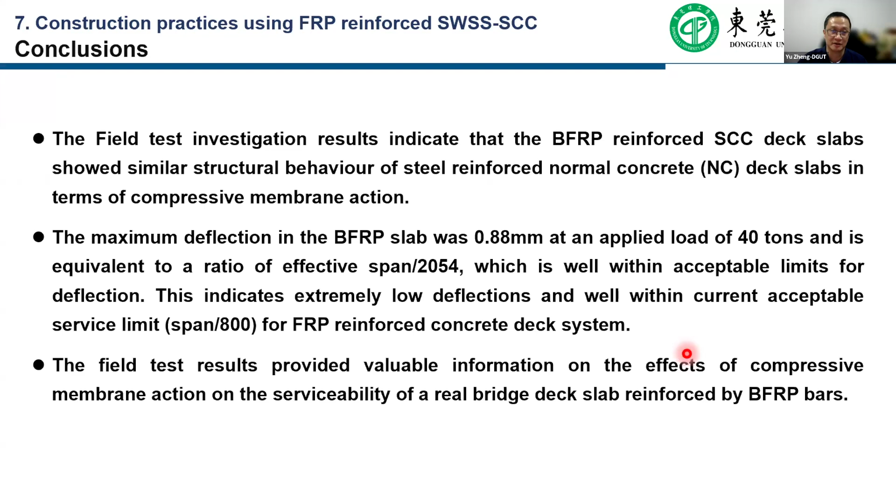We can find that if we consider the arching action or compressive membrane action, we can produce durable, economical bridge deck slabs using self-compacting concrete and seawater and sea sand self-compacting concrete, greatly improving environmental factors.

For the second part of this introduction, we tried to build a MIC model at my university. This is the preparation for this construction, using stainless steel and FRP, and this is the construction practice.

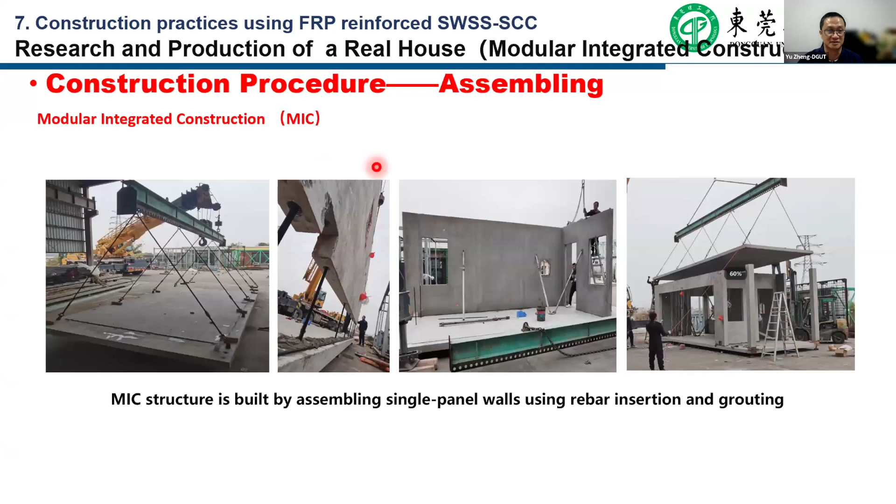This is the assembling process for the MIC model, and this is the whole hoisting process. After that, this model has now been built and is used at my university. It is FRP reinforced seawater and sea sand self-compacting concrete.

After that, we developed an LCA analysis, but due to time limits we will not introduce it here. I will make some final conclusions.

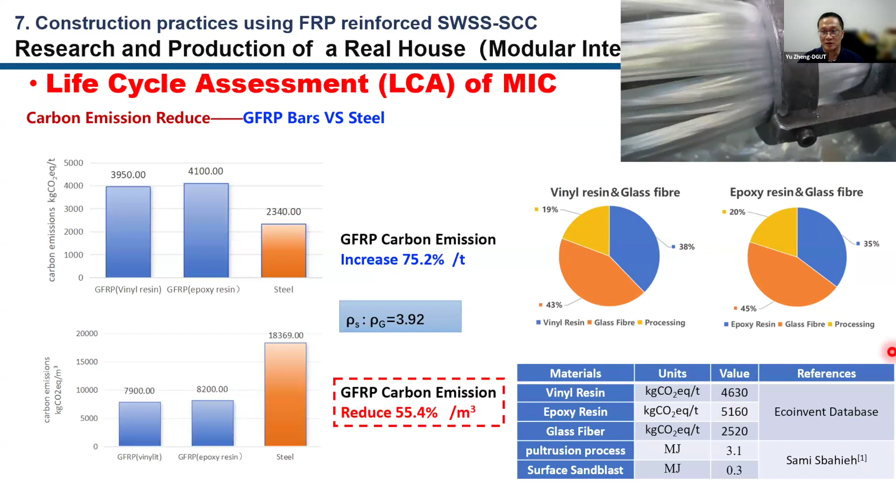After the analysis, we can find that using GFRP reinforced seawater and sea sand slab compared to steel reinforced ordinary concrete, the carbon footprint can be reduced by more than 20%.

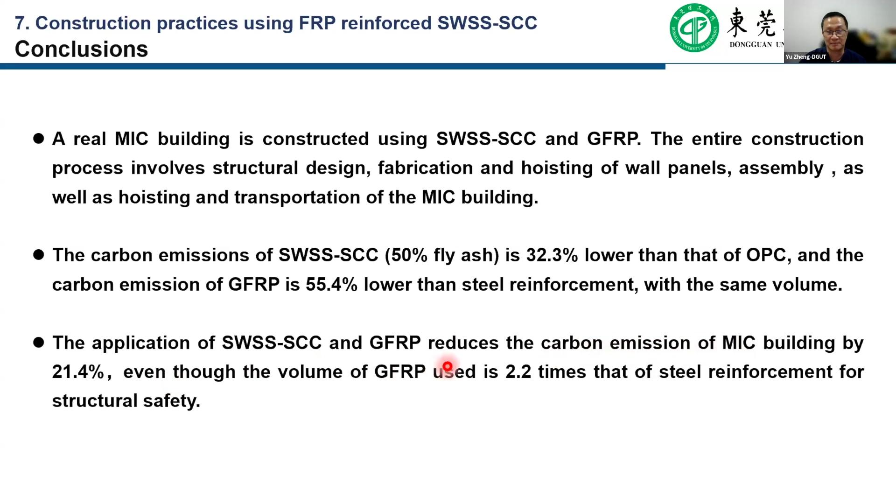The real MIC building was constructed using seawater and sea sand self-compacting concrete and GFRP, with high fly ash content, which allows us to reduce the carbon dioxide footprint. Furthermore, this construction method can reduce carbon emissions compared to steel reinforced concrete structures by more than 20%.